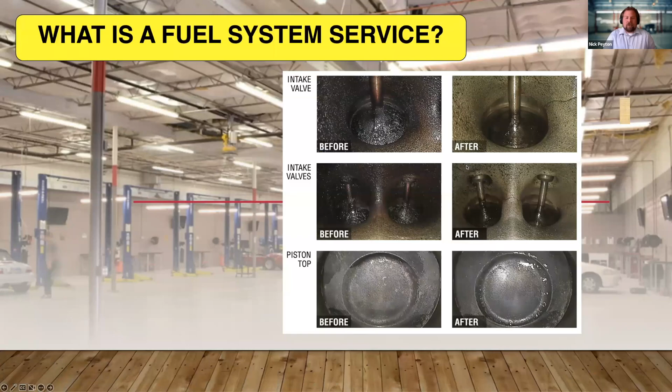So the first question is, what is a fuel service, right? I've been in this industry for a long time, and I've heard everything from an induction service to a fuel cleaning to a gas mileage saver service to a liquid tune-up. And what we're really talking about today is a complete fuel system service. So that would include the injectors, it would include the induction service, it would include cleaning out the items in the tank that are going to cause more deposits and items like that.

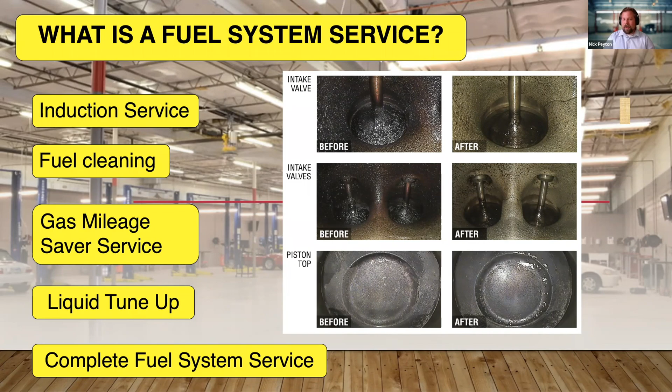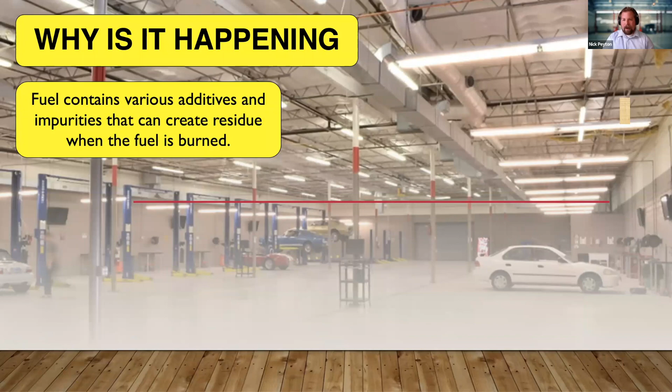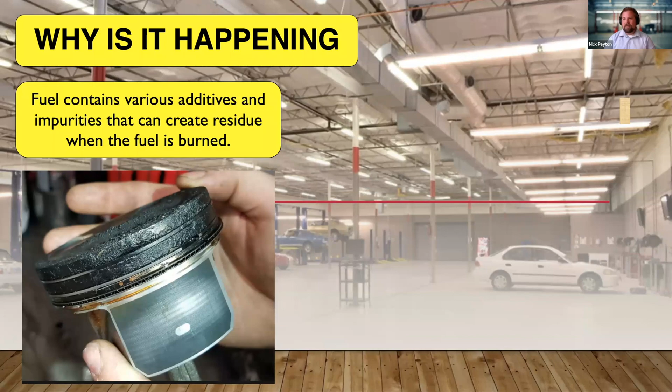So one of the first things that you need to understand is, why is this happening? So what happens is during the burning process of fuel, just like when you have a campfire or you have a fire in your house, there's soot and debris that builds up, deposits that are left after the burn happens, right? Debris, build up, residues, whatever you want to call it. As those build up, they start to cause bigger problems because things are getting sticky and hard and not lubricated like they're supposed to be.

We're seeing carbon buildup more now than we ever have before because of GDIs and a lot of other issues, which I'll talk about here in a second. But the one that you need to know is, if it is a gas engine, especially one that is using a blended fuel like ethanol, which we have everywhere in the United States, you're going to have carbon deposit problems. And a lot of times when you do have severe problems, you'll end up finding out that these deposits are what clogs up your catalytic converter or creates other EGR issues or other issues inside the engine.

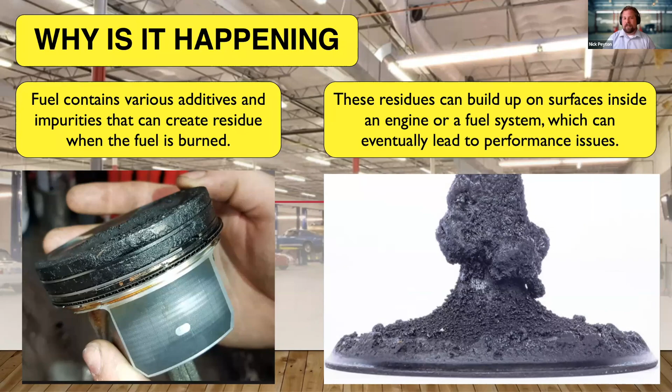So when I was a technician, we used to inspect every vehicle that came in, and one thing that we would always check is the throttle body. Take off the air boot, look in the throttle body. If the throttle body is dirty, especially dirty like this, you can pretty much understand that past it is dirty, and we'll talk about why here in a second.

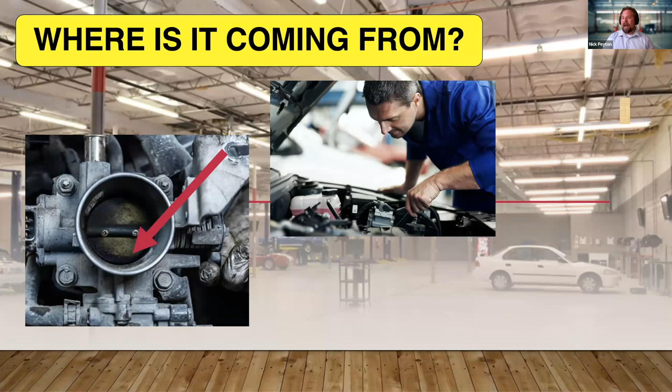So there's three ways that the intake system gets dirty. The three most common ways are: one, what we're looking at right now is the throttle body between the air filter and the intake of the engine. There will be debris that will get past the valves and blow up into the intake, and that is one of the places where the debris will build that we need to clean out to keep the engine running properly. So if you're seeing debris at the throttle body, you can imagine how dirty it is in the rest of the intake, and it was always a good determinant for us.

I understand that nowadays on a lot of cars it's very difficult to look at the throttle body, and on most of these vehicles we can recommend it based on mileage because we know that it has so many miles on it, it's gonna be dirty just from our experience in the industry.

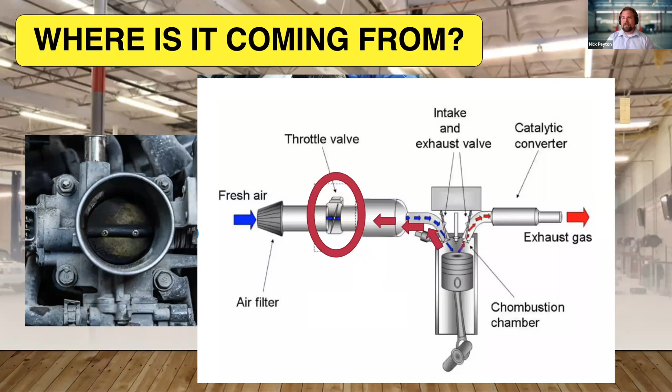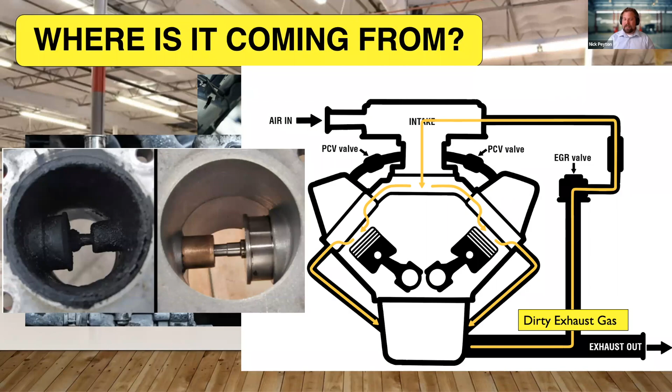The second way is the EGR system. So in the morning, the EGR system activates, and what it does is it takes hot exhaust gas, and it's hot, but it's also dirty, to run through the intake to warm up the air coming in the engine, to warm it up quicker so that it hits its emission standards faster. With that dirty exhaust gas, you will get the same kind of debris buildup. This is another reason that the throttles and the intakes get excessively dirty now.

The third way is through the oil system. So in the bottom, there's oil. The pistons are pumping up and down, pumping up and down, making a lot of air pressure, a lot of moving around, right? That has to be vented somewhere.

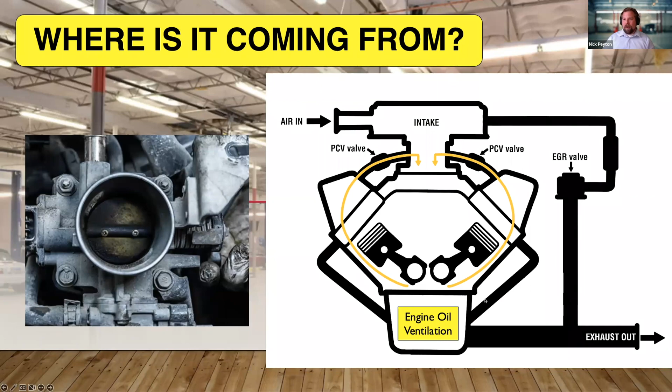So the PCV system runs it into the intake to burn it as it goes out. The downside of this is, if you're not maintaining your oil and keeping things clean, you will get oil debris up into that system.

If you're replacing a lot of crankcase vent valves or PCV systems, and if you have a Ford and the hoses are always deteriorating, this is why: the oil is acidic, it's eating that stuff and clogging those things up, and we see a lot more of those problems than we did before. Another thing that happens is that the injectors, when they're spraying on top of the pistons, if it's not clean and working properly and it's gunked up, that fuel will get by that system and go into the oil, making the oil evaporate even faster through the intake system, and it goes out through the cat. This is usually what clogs up the cats prematurely.

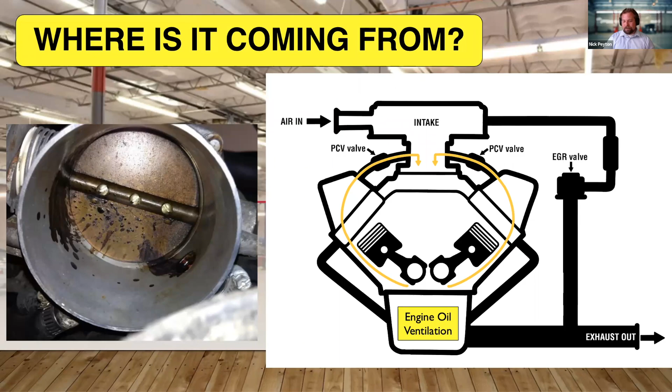Now, there has been a very big change in the way that engines are designed. Every year they've got to get more fuel efficient and faster and lighter, etcetera. So before, we had a port fuel injection system, where you see the injector is where the fuel is coming, or the air is coming into the piston, and then it's going to go out. With this system, when that injector sprays, it sprays fuel on top of the valve and does a much better job of keeping it clean.

Modern engines nowadays have direct injection cars where the injector is not spraying above the valve, but is spraying directly into the combustion chamber, and this creates a different set of issues that we've never dealt with before. When this one's spraying, you can see how it's not spraying on the valve and not washing off that carbon buildup. We call this injector washout.

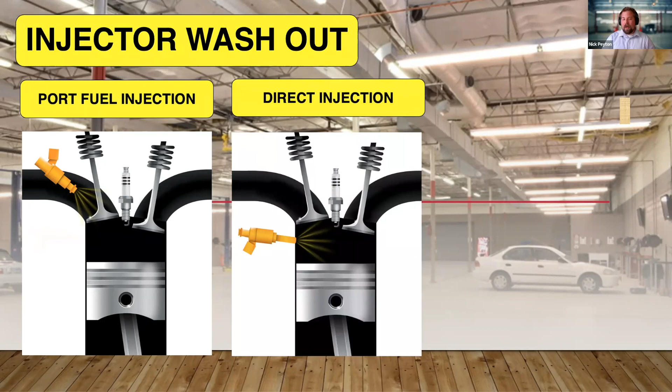Some new manufacturers are coming out with dual injector purposed cars for the point of keeping the valves clean. They all realize that this is an issue. Most of those manufacturers are using our product to solve this problem because they didn't really understand it was going to be as bad as it was, just like we didn't either. So both of these are direct injection engines, and anything with a direct injection engine, I would definitely do a platinum fuel service on, which we'll talk about here in a second.

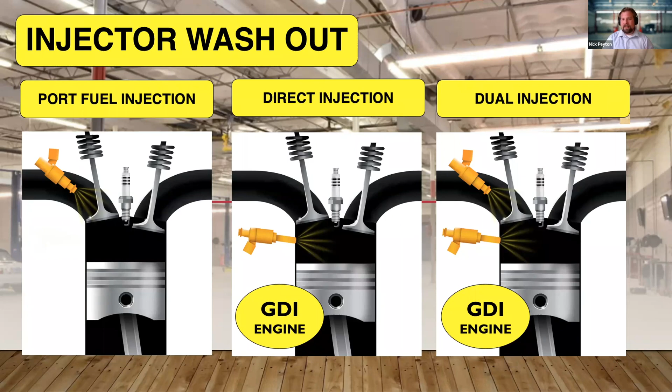So we talked about with the piston, right? So for people that are still learning here, air is going to come into the piston through the intake valve, and this is an example of a port fuel injector. Then that air is going to come into the cylinder, and then it's going to go out of the exhaust right after it does its job.

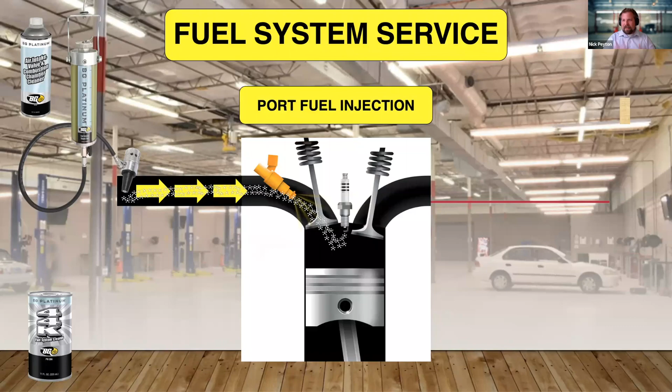What we're talking about doing with a fuel service is we're hooking up a pressurized chemical or a vacuum operated chemical. This service works on vacuum, and you hook it to anything, and what it does is it creates a very fine mist, and that very fine mist starts getting sucked into the intake and starts coating everything and loosening up deposits and cleaning everything, right? And then we rev the engine while we're doing that service, and it's going to suck it into the combustion chamber, mix everything up in the combustion chamber, clean the top of the piston, get your compression back up, and then it's going to go out the exhaust.

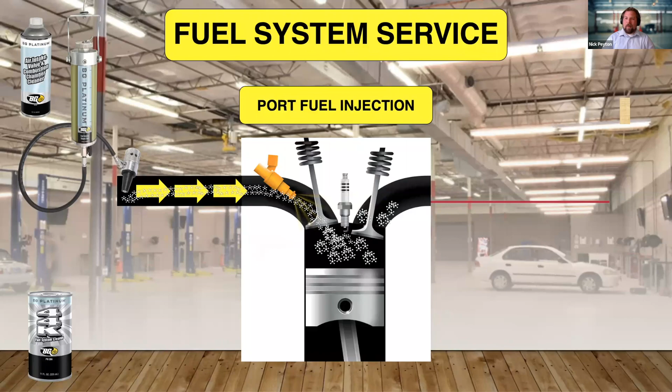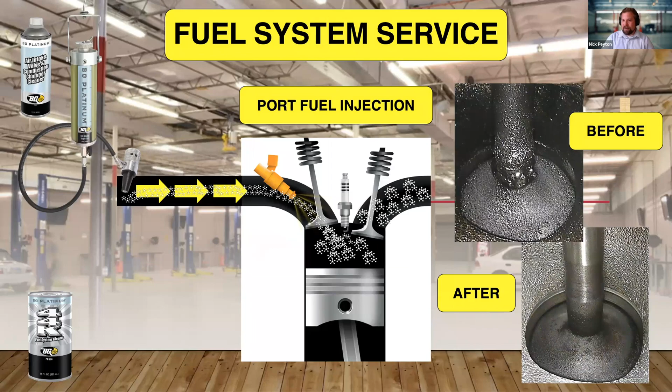Now, in a direct injection car, it would work the same. So we would hook up the same apparatus to the intake pipe coming in, and you're going to suck that chemical in the same way. Now, you can see with this style injector, it's not going to spray on top of the valve, so the valve is going to get a lot dirtier and it gets baked on. It doesn't get cleaned like it used to.

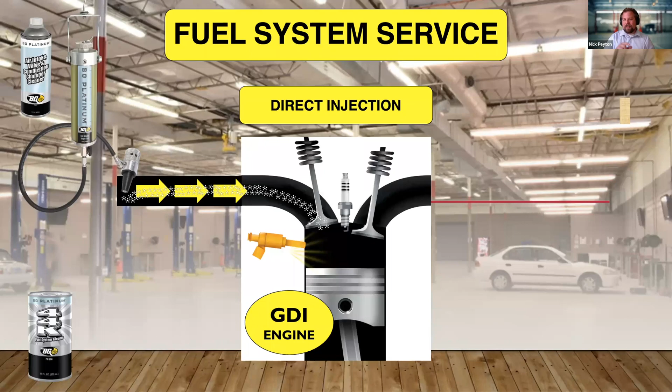So when we do this service, you can see how it's spraying on top of the valve, and that's what's going to clean everything out and keep things moving the way that they are. The stuff is a lot harder to dissolve in a GDI car than it is in previous port fuel injection. It gets extremely hard.

If you've ever walnut blasted, you know exactly what I'm talking about. The platinum fuel service will dissolve this stuff. You don't want to just knock it off and blow it out the back, you've got to dissolve it so it won't clog up anything as it's getting cleaned up.

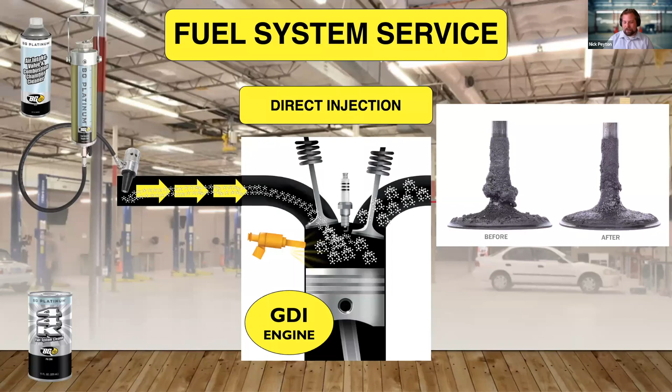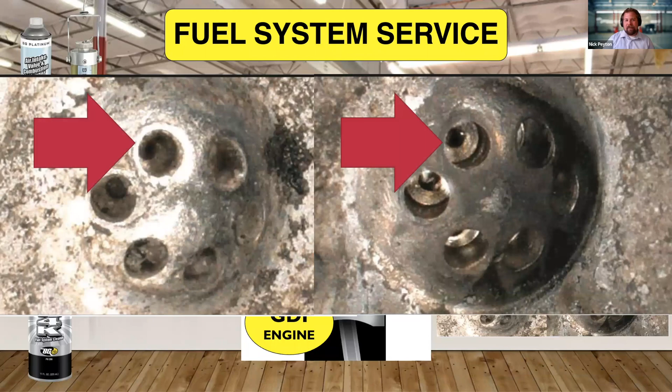Now, this is a picture of the tips of the injectors. They're a lot smaller than you think they are inside the piston. As we zoom in, look at the difference of how much gunk is in that tip versus the ones on the right. This is why using the fuel service in a GDI engine increases the gas mileage and horsepower by so much, because we're cleaning out those microscopic components that we're asking to do so much now that we never asked to do before.

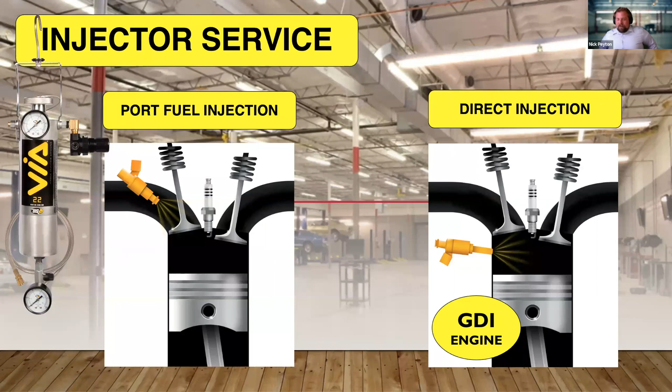Next, another type of fuel service is doing a direct injection service. This is where you would literally hook up a pressurized apparatus to the fuel rail, disconnect the fuel pump's power, whether it's by the fuse or whatever's easiest in that chassis, and spray a cleaner directly into the intake and through the injector.

Most of the shops using this are specifically trying to target injector issues, or misfires because of injector issues, and this is part of the plan that you would build for your fuel service packages, which we'll talk about here in a second.

Now, when you are selling a package, whether it's the platinum service or the direct injection service, I would always recommend packaging it with 44K. 44K is going to take care of the entire system, from the fuel tank all the way out the exhaust.

It's going to clean the injectors. It's going to lubricate things. It's going to take care of the deposits in the tank before they get up to the engine, because as the fuel degrades, it creates deposits, okay?

So this 44K is so strong, it will clean out the catalytic converter. We have a lot of people that have had really good feedback about using the product.

Recently, I was given a loaner car because my car was in an accident, and I had 20.5 miles per gallon on this Ford Explorer. So I drove it 1,000 miles, reset it, and put 44K in the tank. It went up to 29, then back down to about 26, and it stayed at 26.

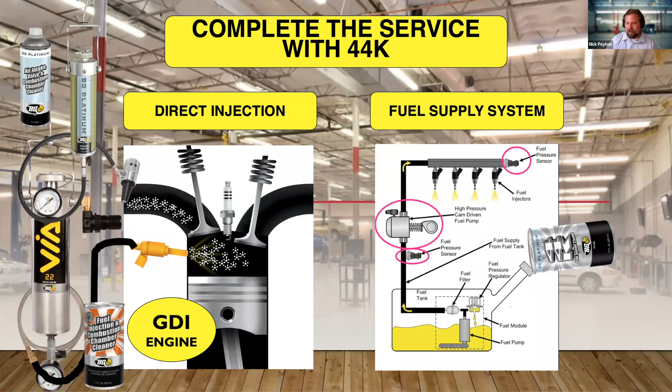Now, one thing I would suggest you do as a team when you start diving into fuel services, or how you're going to recommend them - and look, we're here to help, if you have questions let us know, we can sit down and talk about this - but really, as a shop, you need to figure out what your fuel service plan is going to be. What are you going to recommend? And why are you going to recommend it at that interval? So you're all on the same path and can explain it to the customer as a strong, united front.

Most shops on modern cars are recommending the platinum fuel service every 15,000 miles. You might not get the customer to do it every 15,000 miles, but for the people that want to take care of their car, they will. And if you can't get them to do it every 15,000 miles, try to get them to do it at least every 2 years. If not, they're going to have a carbon-related issue down the road.

We have a lot of fleets that do 44K every single oil change, and they'll go 10,000 miles per oil change, and they don't have a lot of problems. That's their solution for fuel issues currently, because they've got to get them in, they've got to get them out, they've got to do it quickly. It's all about how you want to package it to sell it to your customer.

We have some shops and dealerships that recommend the fuel service through the injector directly because it's a service they think is better fit for the customers they see, and they'll get it at 30,000 miles, or maybe 50, depending on the driving habits and the items you see. All of these fall under the BG Lifetime Protection Plan. And again, if you have questions about building a plan for that, we can help you with that.

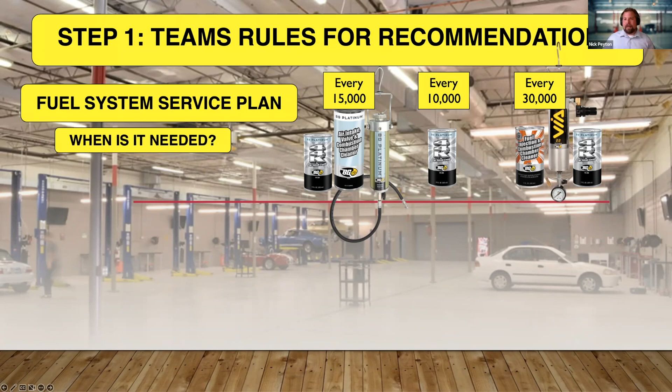The first question you guys have to understand as a team is why is it needed, when is it needed, what are we recommending, and what is the issue? So first thing, anything that comes in for a misfire issue, whether it's check engine related or not, I would highly suggest that you start with this.

We're solving a lot of issues on modern cars with cold start misfires with the platinum fuel service because the tips of the injectors get really carboned up, and guess what, they cause an issue.

Next, any check engine light repairs. If it's related to any of the systems that could be touched by the fuel system, I would recommend doing the repair, like an EGR, and then also doing a fuel service afterwards to get all this stuff cleaned out. Also, the customer will notice the car is going to run a lot better.

Next, any minor tune-up, right? We don't replace spark plugs like we used to, so Mr. Customer, but we do a yearly fuel service, replace your air filter, and that's what we'd recommend to get your car to 200,000 miles and get you the gas mileage you would expect out of this vehicle.

Next, any preventative issue to keep it from happening again, right? We're recommending this because we don't want to see this problem down the road, especially if you're working on a kind of vehicle that you know has a specific fuel issue problem.

A dirty intake, right? We inspected the air filter during our inspection and it's nasty. We're going to recommend doing a fuel service now.

Consuming oil. Is the car consuming oil, or is there a lack of power? With both of those issues, it's really good to start with a platinum fuel service, because most likely the thing is extremely gummed up, and that's why you're having these issues in the first place.

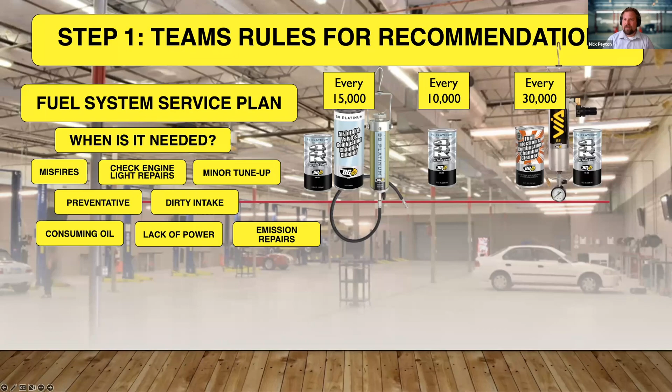Now, why do we recommend these intervals? Like I said, I want you as a team to sit down and figure out what interval you want to recommend and why, because it's your shop, you have to stand behind it, and that's what you believe in, right? But I want you to understand the why.

So we want to reduce future expensive repairs. That's a huge one for fuel services. I've had so many customers get cats cleaned up and they last for another 3 years because they did a fuel service to it, right? So there's a lot of items you're not going to have issues with if you're doing fuel services.

We want to restore performance. It's crazy how much these cars lose power in the first 3 or 4 years now. We have a lot of case studies to prove it if you're interested. But we want to keep their car running the way that it does.

Next, extend the life of that car. If you really want to get 200,000 miles out of it, it would be very smart for you to do this and follow this plan.

Save the customer money. You're going to save money in the long run compared to repairing the car, and keeping things clean. We can look at the numbers every day and you'll see it's always cheaper to maintain versus replace. Keep the car longer.

Right now, the other thing is, what if somebody says, well Peyton, I'm not going to keep it forever? Well, a maintained car with a lot of records is going to sell for a whole lot more money than a car that's got nothing done to it and you're just trying to get rid of the thing, right?

And then the other thing is lesser chance of a comeback. For you as a shop, the last thing you want is that customer calling you and saying, hey, the thing still doesn't run as good as it should. If it has a misfire and all you're doing is replacing the spark plugs, you're going to have this happen. When you do the fuel service, it's going to clean everything out and get that car back to the power it should be, and you're going to have a lot less phone calls of, oh, it doesn't seem like it's really 100% fixed, because at this point you have to do the fuel service to complete the repair.

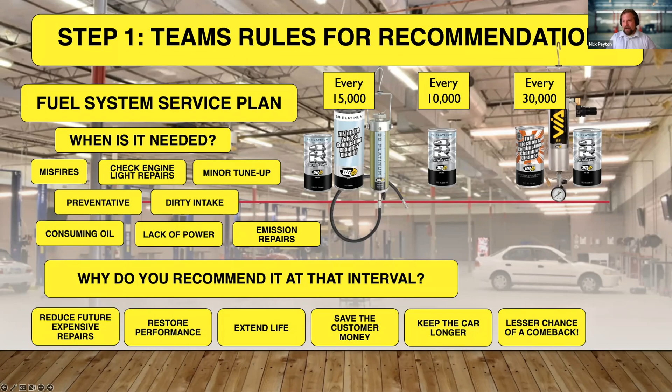So next, build a package that is easy for you to explain.

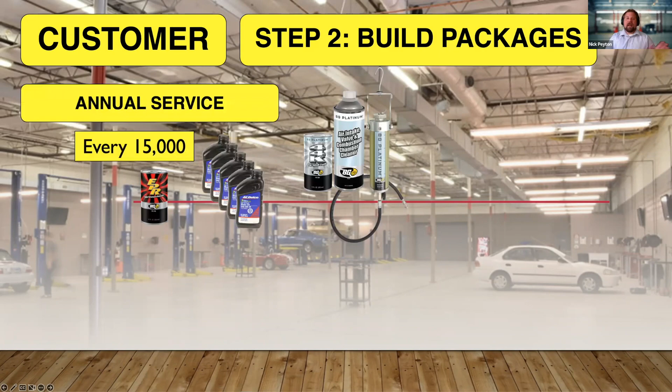Now, everybody does this a bit different because it's whatever's easiest for you to explain. Some people will talk about a fuel service once the car's been looked at. Some will talk about building a service for every 15,000 miles. We'll do the oil change, a fuel service, the oil cleaner, the oil additive, a cabin air filter, and a Frigi-Fresh service for $479.97.

This is what we recommend as a yearly service, because the cabin's going to be dirty by then, the engine filter is going to be dirty, the throttle body is going to be dirty, it's going to need an extended life oil change, et cetera. So the annual service is to keep your gas mileage up and prevent issues down the road.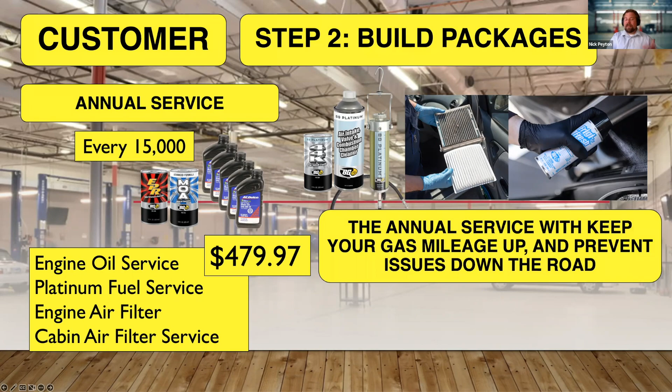For your good customers that want to keep their cars forever, this is a really good recommendation. If you feel more comfortable selling this package every two years, you can do that. But the problem is on GDIs, we're seeing that a one-year fuel service is really what you need to do to keep it 100% clean and have no issues down the road.

Also, with stuff like this, I found it was a lot easier as a service advisor to recommend it coming up — meaning, hey, you don't have to do it this visit, but at your next visit you're going to be due for this. It's going to be about $500 because we're going to do a fuel system cleaning, your filters, and all these items.

People want to take care of their car, but if you always give them an opportunity to say 'oh, don't worry about that,' of course they're always going to say no to it. What you need to remember is that it's about convenience for most customers. They're already there, they need to get it done, and they don't want to have a breakdown. This is the best way to prevent that from happening.

The car's efficiency is going to increase. They will pay for the cost of the fuel service through the gas mileage they save alone. Also, saving money on future repairs, increasing the reliability of the vehicle — the last thing somebody wants is to have an issue. And then there's the time saved from not having to come back.

So one of your best opportunities is to try to get them to buy these services while they're with you. Now, if you struggle with selling this as a package, the other option is to get them to do the basic thing they came in for — an oil change or whatever the case may be — have the technician look at the car, and then call them with the same items and say, 'hey, we looked over everything. The technician's recommending these items because of these reasons, and this is why we want to do this.' That makes it easier for a service advisor. If you need help with this or have more questions, feel free to let me know.

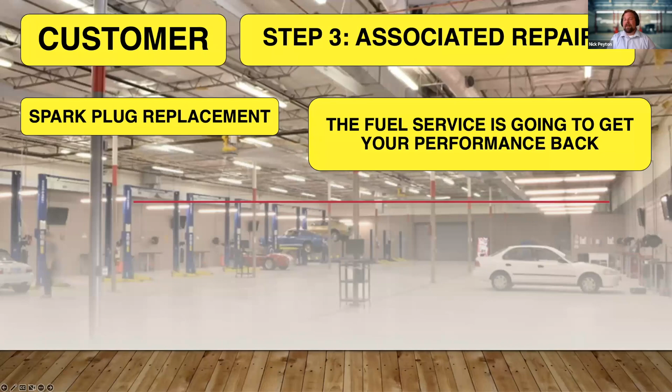So a couple of associated repairs. Again, if you're replacing spark plugs, the fuel service is going to get the performance back with the vehicle. If you don't do a fuel service with it, it's not going to run a whole lot better, and most of the carbon buildup is still going to be in there, which is going to cause a bigger issue — check engine lights, right?

The fuel service is going to clean out the deposit buildup that helped cause the problem. For oil consumption or burning, the fuel service cleans out the oil and deposit buildup causing the consumption or burning in your car. This is a really good service to do for oil consumption, because what happens is the rings get all gummed up — the fuel service will clean it out, the compression will go up, and they won't be burning so much oil.

So customers, right? I always have a couple of funny things that always happen to me over the years.

This was one of my favorites. "I've never done that before. That sounds dumb," right? So how do you get over that rebuttal with a customer? I've always been a believer in laughing on the phone. It's okay to laugh, like, ha ha. "Well, I understand that you might think that it's dumb, but let me explain."

"We're doing more fuel services a day than we've ever done. Carbon buildup is more of a significant issue than it's ever been because of modern engine design and ethanol in our fuel. We recently did one to my car, and I can tell you it runs much better. I know you will be happy with the service." See what they say, right?

So you've got to remember that if you're going to recommend something, anybody is going to challenge you on that. And if you don't have the ability to explain why it's important the second time, they're never going to trust you about any other recommendations in the future. If they say that sounds dumb and you say, okay, never mind, let's move on to the next thing, right? You're a doctor looking at their car.

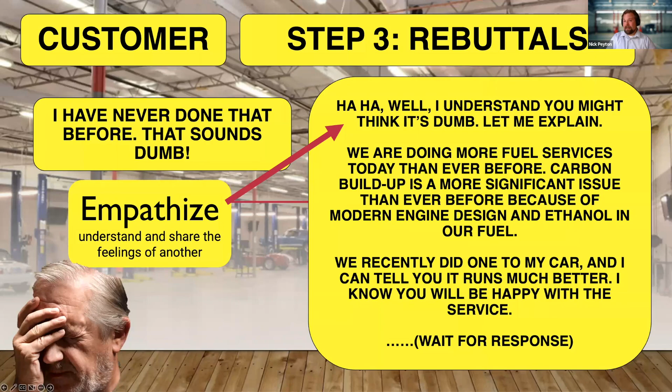The other big one I'd get a lot is, it's not in my owner's manual or book. "Sally, I understand. We are doing more carbon buildup related repairs than ever before. We have partnered with BG Products, which has a proven service to remove the harmful deposits that cause these issues. We recommend this service to anybody who wants to prevent expensive repairs later and keep their gas mileage where it should be. Can I get this done for you today?"

And then shut up. Shh. Let them think, okay? I have sold so many fuel services over the years because of the gas mileage line, because it gives them a reason to cost justify the expense of doing the fuel service on the car, right? Some people just need that little checkbox. So that's a good one to slide in your closing statement, okay?

So again, we're empathizing that we understood what she's talking about. Then we're going to work on educating them. The line before that is called group buy-in, but we can talk about that more later. But what we're really doing is educating them to understand why it's important, right? If somebody challenges you on something, you can't just go, oh, don't worry about it, right?

If you bring it up and I say, I don't know if I really need that, I'm waiting for you to tell me why I do. They're really saying, hey, Peyton, explain to me what's really going on, why I need this or why it can wait, right? Lastly, remember to ask for the sale. A lot of times people lose sales because they just don't ask for them. So at the end, it's always easy just to ask, and all they have to do is say, yes, go ahead, and you can get the job done.

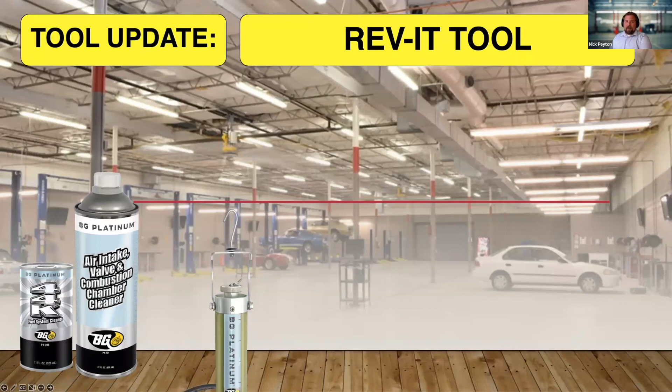So real quick, the tool that we're talking about today is the Platinum tool with the Platinum kit. This is the KF65 kit. That is the best thing for you to use for GDI carbon buildup. This is what's designed by BG to prevent walnut blasting and carbon buildup and clogging cats and all that fun stuff that we're dealing with nowadays.

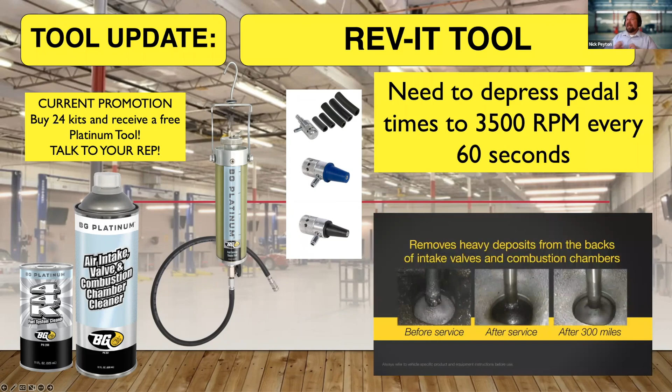And the reason that we want that is that's what agitates all the chemical and gets it on all the carbon, and not just the carbon at the front of the intake, not the carbon at the back of the intake, but it gets it everywhere by agitating it, okay?

Now, the tool that does this for you is called the BG REV-IT tool, and it attaches to the steering wheel, attaches to the pedal, it's air operated, and it'll pump the pedal for you so the technician can work on something else, like doing a brake flush or whatever other service they might be doing while the car can maintain itself and it gets the correct throttle snaps that it needs.

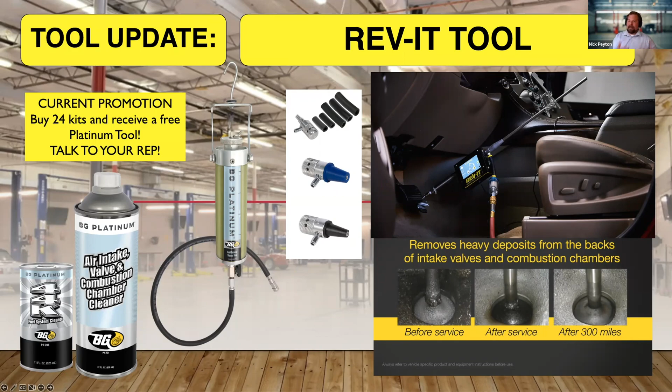I took a video of it doing it on a car real quick, and I just did it in a loop so you guys can see it going here. What it does is every 60 seconds, it's going to rap the throttle 3 times, and then it'll wait 45 seconds. What's happening in that 45 seconds is it's building up the mist in the intake and collecting, and then when you rap it, it agitates it and gets it everywhere that it needs to be.

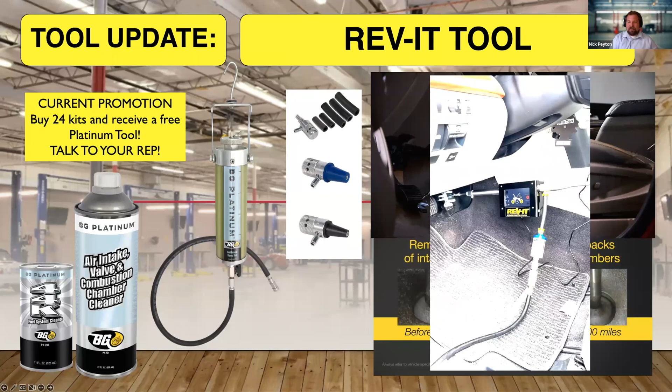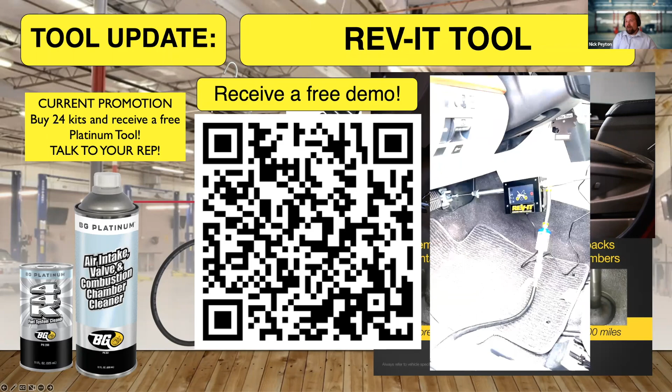Now, a couple things to remember real quick. 1, listen. Listen to what they say when they drop the car off. They'll tell you, oh, I'm going to take a trip. I want to make sure everything's good on the car. That's a great time to bring up a service because they don't want to have an issue on a long road trip, right?

When they come back to you with a question, make sure that you empathize with them and you let them know that you listened and you understand what they said, even if it's the dumbest thing you've ever heard. Look, Mr. Johnson, I understand how you feel. If I was you, I'd feel the same way. I've never heard of a fuel service before, but let me explain to you what it is and why we're recommending it, and then you can decide what you want to do.

Right? Sometimes they want to fight with you, but you've got to stand your ground because you're the expert that they chose to bring the car to, and you've got to be the one that can stand your ground and say, look, I understand that this is expensive, but if you're really going to keep this car, you need to take care of it or you're going to have bigger issues down the road. Nobody can argue with you on that fact.

Okay? Next, educate. You'll figure out which lines work better for you, whether it's, oh, there's carbon built up, or an engine's like a fireplace and soot builds up and we need to clean that soot up just like, you know, a chimney cleaner, right? Everybody has their little line that they'll do.

I used to like: we don't tune up cars like we used to. We do it every 10 years now. So we need to do fuel services every year to keep the car's performance so that in 10 years we tune it up and we just keep going, right? A lot of customers can understand that and relate to that.